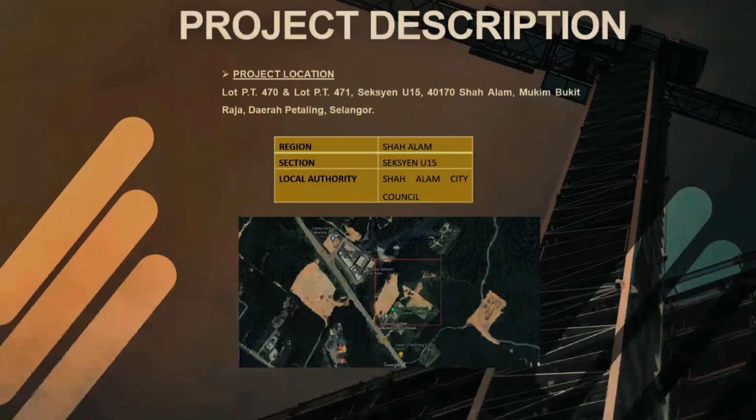Bismillahirrahmanirrahim. Assalamualaikum warahmatullahi wabarakatuh. We are from M.O.C Consultancy SDN.BHD, and today we will be presenting on the environmental impact assessment of our project, which is cadangan pembangunan perniagaan dan membina sebuah kompleks sukan 3 tingkat di Seksyen U15 Shah Alam, Mukim Bukit Raja, Daerah Petaling, Selangor.

The objective of doing the EIA report is actually evaluating and communicating the potential environmental effects of the project according to Section 34A of the Environmental Quality Act 1974. Our proposed project is a 3-story sport facility and business development building.

The objective of our project is to improve the community's physical fitness and health while also making it more convenient for them. The second one is to develop sporting talent in a pleasant, safe, and enjoyable environment. And the third one is to give the community a high quality experience.

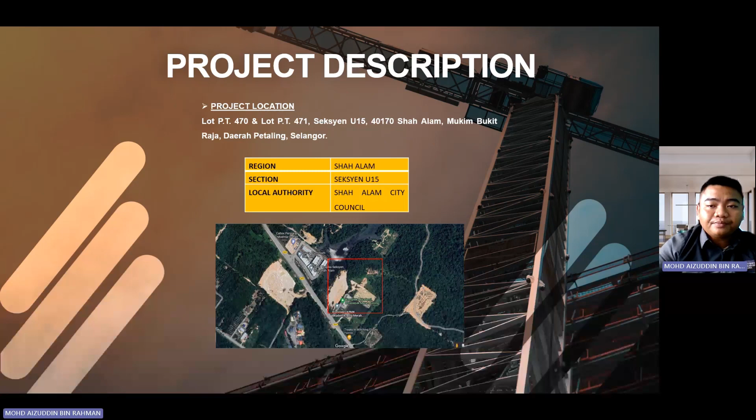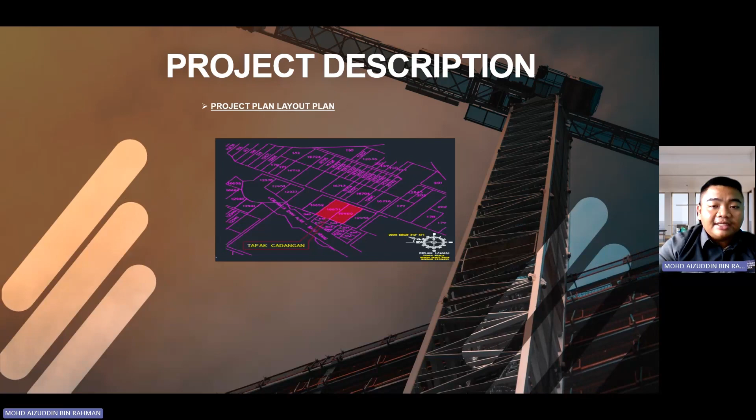You can see on this slide our site. Moving on, this is our project plan layout. The highlighted area in red is our proposed site. For our project, we have listed the ground level, first floor level, second floor level, and roof level, and every floor has its own components.

For air quality management, we will install a solid barrier around the whole site. For solid waste management, the construction company and their subcontractors need to be apprised of the waste management, so solid waste is controlled. For drainage management, to control the disposal of water, a storage tank is placed on top of the building and empties into the rainwater harvesting system as it flows down the gutter.

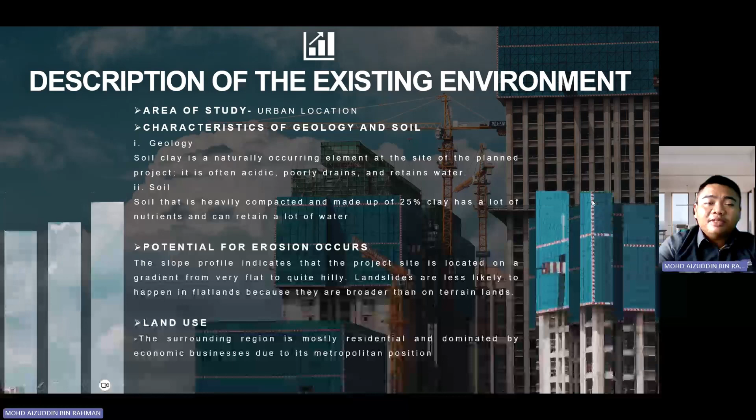Chapter 4 is about the assessment of the anticipated environmental impacts. There are 7 negative impacts: air quality, soil erosion and waterlogging, extraction and uses of building materials, noise pollution, solid waste generation, increased usage of energy and traffic disruption, and workers and public safety.

For air quality, during the building phase, small particles and waste gas will be released into the air around the construction site. This will cause breathing problems, asthma, coughing, and worsening of existing heart and lung disease. For soil erosion and waterlogging, land will be cleared and excavated. The soil will be exposed to agents that cause erosion, resulting in soil or land degradation, which will have a negative impact on the environment and cause waterlogging.

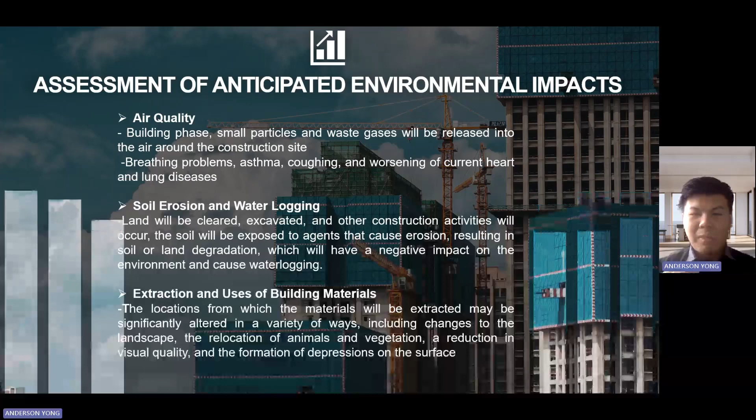For extraction and uses of building material, the extraction location may be significantly altered in a variety of ways, including changes to the landscape, relocation of animals and vegetation, reduced visual quality, and formation of depressions on the surface. For noise pollution, the most often reported negative impacts include interruption of oral communication, hearing loss, fear, and difficulty sleeping. One possible negative impact of vibration is that existing structures are prone to fracture.

For solid waste generation, inappropriate disposal of this waste may have a detrimental impact on the neighborhood, since improper rubbish disposal may have detrimental environmental implications.

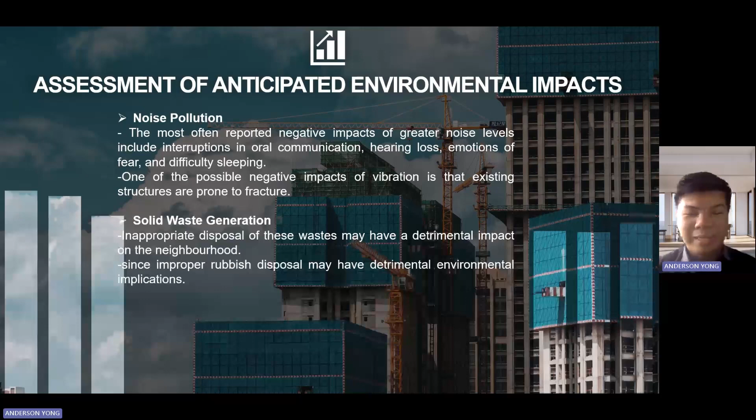For the increased usage of energy and traffic disruption, water will be used mostly for concrete manufacture, wetting surfaces, and cleaning completed construction. So consuming too much power will strain the resource and have a negative impact on sustainability, since energy production needs the usage of natural resources.

And finally, workers and public safety. Hazards may harm both the general public and the construction personnel who are working on the site.

Okay, so the positive impact of the assessment of anticipated environment impacts, there are 2 points here. The first one is job opportunities. The proposed project's construction is expected to provide work possibilities for a lot of people. So this can be directly or indirectly.

And the second point would be increase in building material demands in the market. The planned project would need the procurement of considerable quantities of building materials, the bulk of which would be obtained locally in the areas immediately around the construction site.

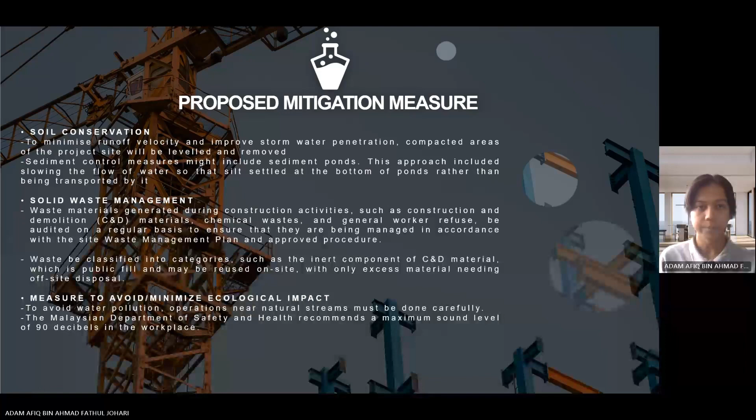Next, the measure to maintain water quality. Regular inspection of the hydro brakes, gullies, and fuel interceptors is necessary to verify that the site is not contaminated or has an excessive amount of water runoff. On-site diesel or oil fuel should be kept in approved containers inside defined zones. Lastly, stormwater drainage. Constantly monitoring water use will assist to avoid leaks and waste. Stormwater management should adhere to the SPAN standard.

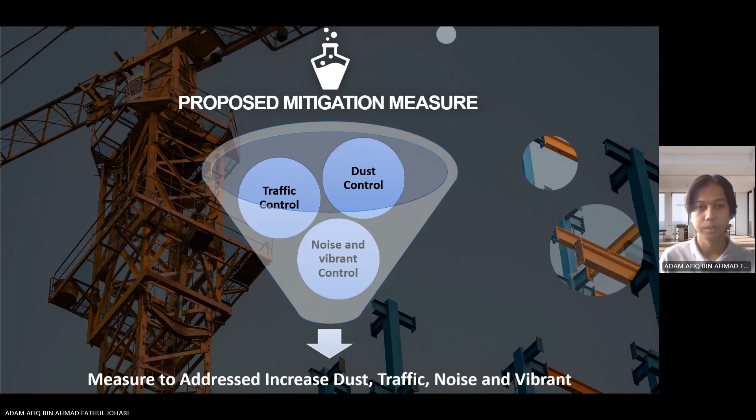Measures to address the increase of dust, traffic, and noise and vibration are traffic control, dust control, and noise and vibration control. These are the proposed mitigation for the increase of dust, traffic, noise, and vibration. For dust control, regular monitoring of dust deposition levels will be carried out to assess the possible impact of construction activities on local ambient air quality.

For traffic control, one factor is to consider how the roads are designed to handle the different kinds of transportation in use. Next, noise and vibration control. Employees who use machines with noise levels more than 80 decibels for more than 8 hours must wear earmuffs. Earplugs are advised for workers in environments with noise levels ranging from 70 to 80 decibels. Lastly, for safety issues, we provide supervision, proper signage, and comply with all occupational health and safety regulations. Also, encourage the use of personal protective equipment, PPE.

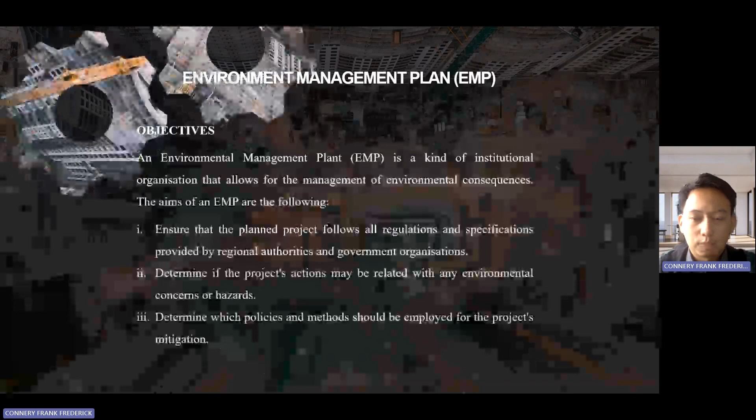On Chapter 6, I will be explaining about the Environment Management Plan, also known as EMP. So what is EMP? EMP is a kind of institutional organization that allows for the management of environmental consequences. The aims of an EMP are to ensure that the planned project follows all regulations and specifications provided by regional authorities and government organizations. Also to determine the project's actions that may be related with any environmental concerns or hazards. And the last one is to determine which policies and methods should be employed for the project's mitigations.

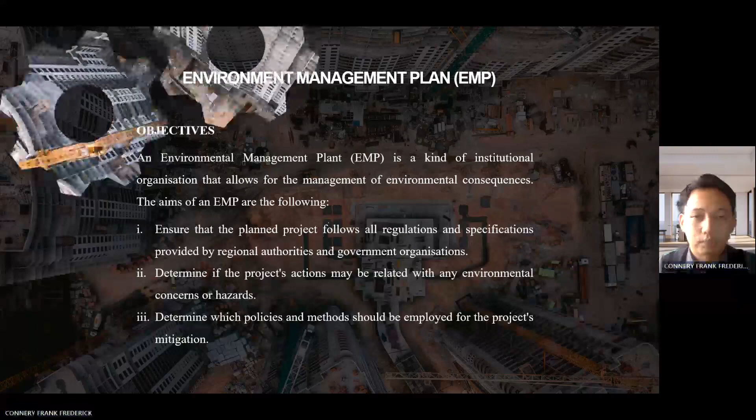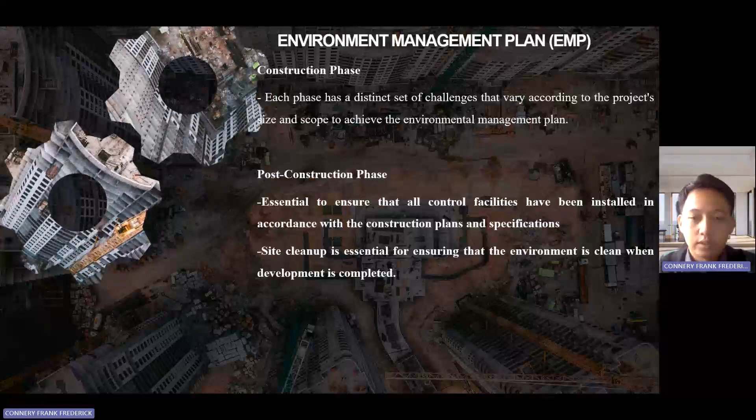So there are two phases in EMP. The first one is construction phase, where each phase has a distinct set of challenges that vary according to the project size and scope to achieve the environmental management plan. The second one is post-construction phase. It is essential to ensure that all control facilities have been installed in accordance with the construction plans and specifications. And site cleanup is essential for ensuring that the environment is clean when development is completed.

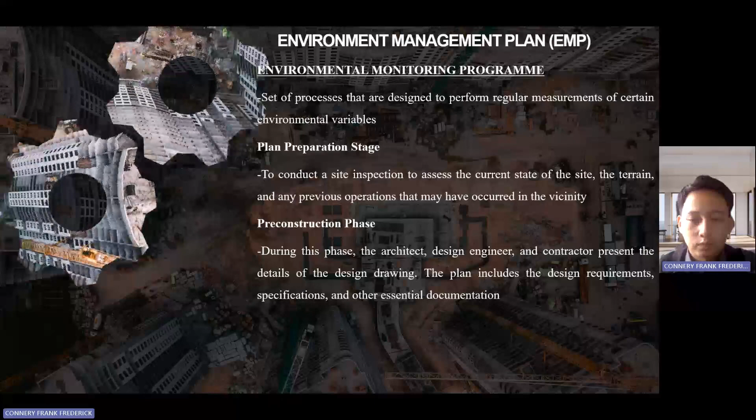There is also a monitoring program, a set of processes designed to perform regular measurements of certain environmental variables. The first one is a plan preparation stage, which is to conduct site inspections to assess the current state of the site, the terrain, and any previous operations that may have occurred in the vicinity. And the second one is pre-construction phase. During this phase, the architect, design engineer, and contractor present the details of the design drawing. The plan includes the design requirements, specifications, and other essential documentation.